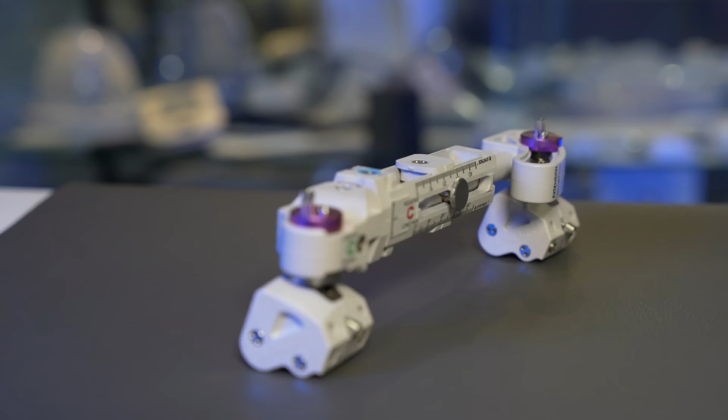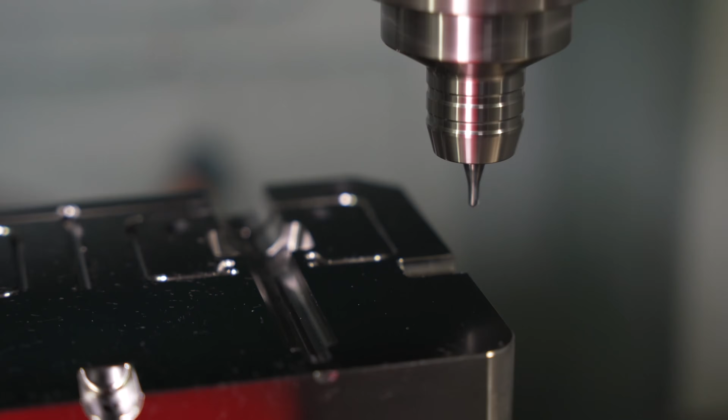Whether it's the cap on a disposable water bottle or a life-saving medical device, behind every injection molded plastic part is a precisely engineered injection mold. Designing and building these tools isn't just a simple step on the way to manufacturing, it's the foundation of reliable and repeatable manufacturing. Mistakes in the tooling stage can be costly down the line.

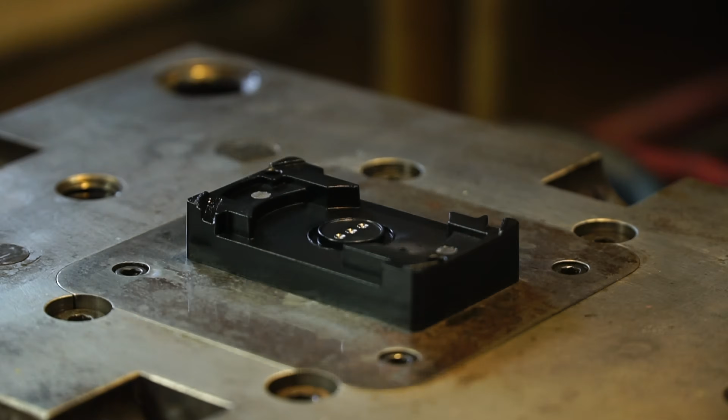So today let's break down the basics of how injection molds are designed and built, why this step is so crucial for the long-term success of a program, and whether or not a mold is worth that high upfront investment, including how to choose the right tooling partner on your next project.

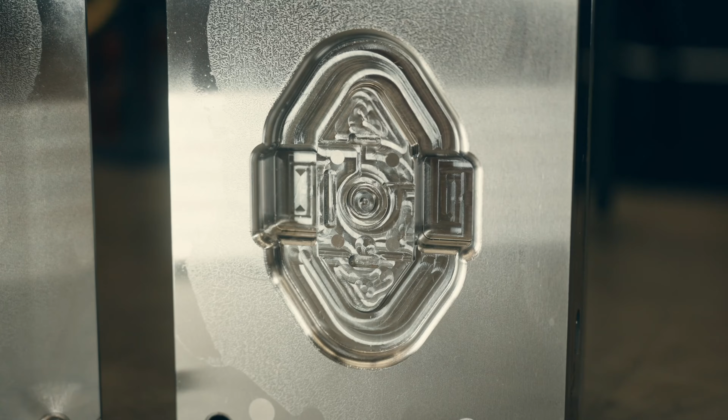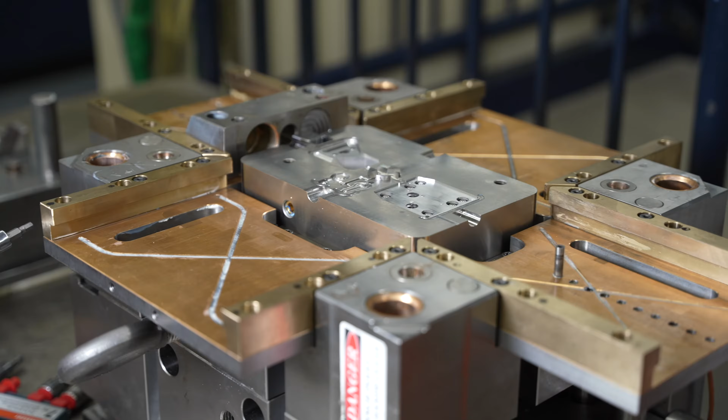In case you're brand new to this world of injection molding, let's quickly clarify what an injection mold is. Simply put, it's the block of metal that shapes molten plastic into a finished component. But if you've seen any of our previous videos on this topic, then you know that it's a bit more complicated than that.

The process of designing and building an injection mold, also known as a tool, involves several key steps, from design for manufacturing, or DFM, the mold build itself, and a number of quality certification tests before the mold is producing finished plastic parts.

If you'd like to dive deeper into Crescent's full project management process, then be sure to check out our dedicated project management video here. But every decision made during tooling will impact part quality, cycle time, and total cost of ownership, which we'll discuss more in a minute.

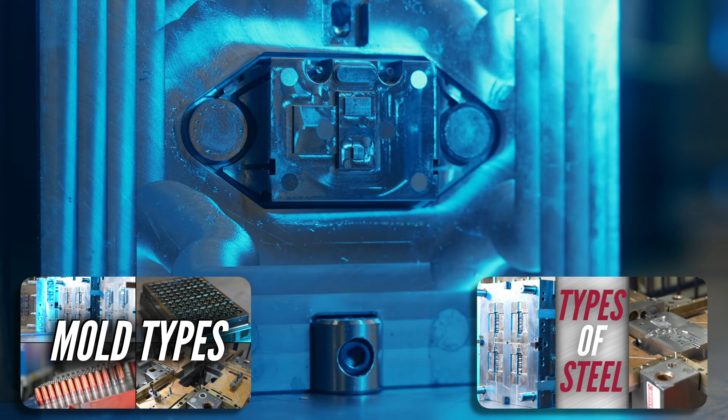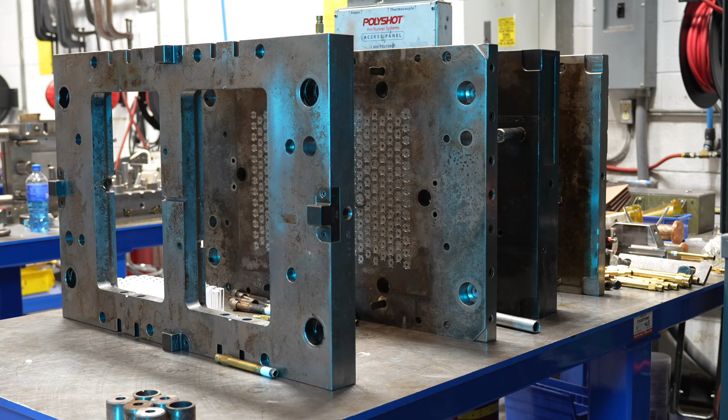Some of the most crucial factors to consider during this stage are choosing the right material for your mold, whether that be hardened steel, pre-hardened steel, or aluminum, depending on the expected volume, resin type, and the required tool life. Aluminum, for example, may be cheaper up front, but this is not a fully hardened production quality tool, meaning it won't hold up well over time, which could lead to higher cost in the future.

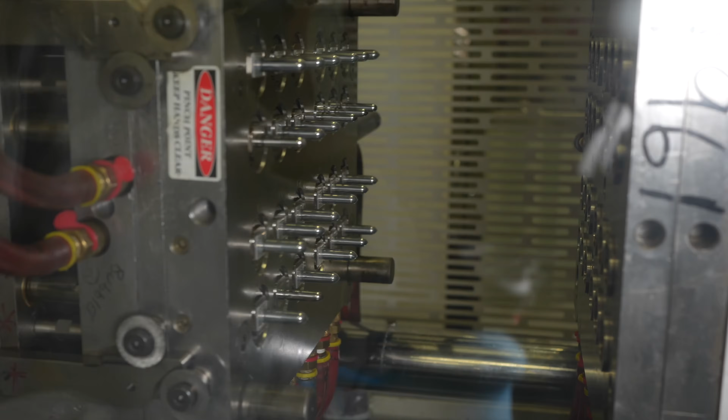Running predictive mold simulation software also helps avoid costly mistakes by simulating plastic flow, cooling, and shrinkage before machining even begins. We'll also need to decide between hot runner and cold runner systems, which is another balance of efficiency when it comes to manufacturing and tooling investment.

Determining exactly where the mold opens, known as the parting line, and how gases escape during injection is another key consideration during this design stage.

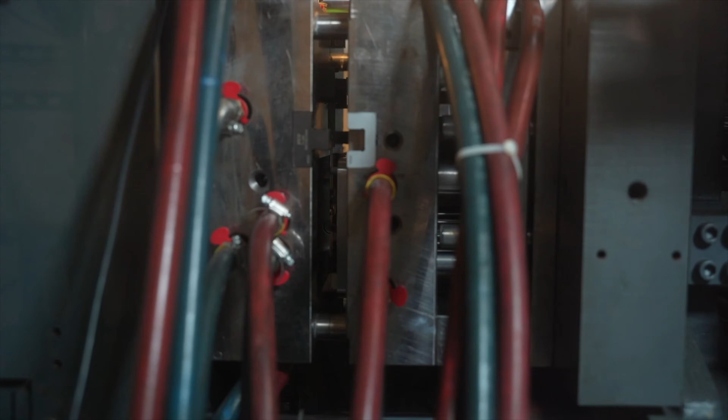And lastly, the cooling and ejection systems and designs are just as important as the design of the part itself. Water-cooled or oil-heated systems ensure proper temperature control during the manufacturing process, which again have quality, cycle time, and cost impacts down the line. Each of these decisions needs to be carefully made to achieve both a quality part at scale while keeping the total cost of ownership in mind as well.

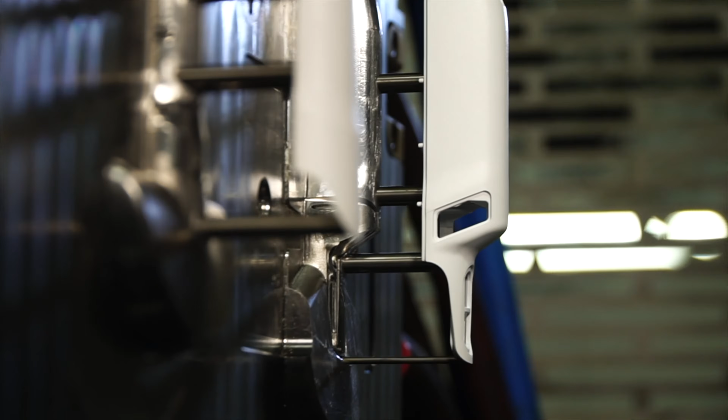Speaking of which, there's no denying that tooling is a significant upfront investment. But it's crucial to look at that total cost of ownership, since cutting corners now could lead to higher costs in the future. As I said, a well-designed tool reduces cycle time, minimizes scrap, and lowers the cost per part over the life of the program.

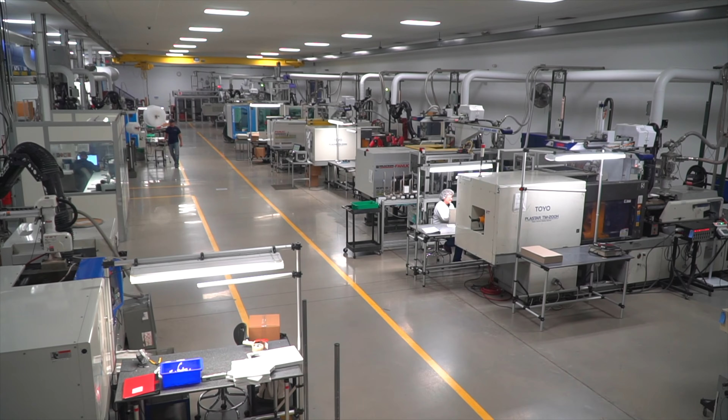Preventative maintenance and support are also key considerations, as they can extend a tool's life and reduce downtime. So when viewed in this way, tooling isn't just an expense, it really is an investment in the future manufacturing process. But is it worth that upfront investment?

Well, unsurprisingly, as an injection molder and tool builder, our short answer is yes, especially for highly regulated industries like medical, pharmaceutical, dental, and defense.

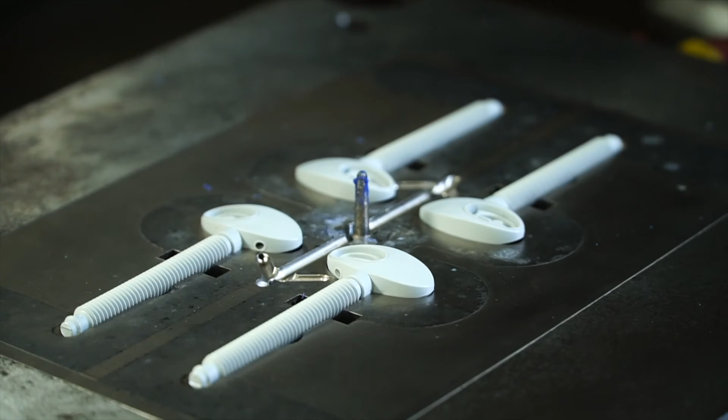But it's also our job as a tooling and molding partner to ensure that our customers are getting as high of a return as possible on that investment, and not needlessly spending their budget on a tool that has features and capabilities that are simply unnecessary for their manufacturing requirements.

That said, in the markets I just mentioned, consistency, compliance, and traceability are non-negotiables. A poorly designed tool can lead to defects, higher scrap rates, and regulatory setbacks, while a carefully engineered tool lays the groundwork for faster cycle times, consistent quality across millions of parts, and easier validation and compliance documentation.

So, looking at the entire life cycle of a program, the upfront tooling investment typically pays for itself many times over when managed correctly. Now, that all sounds great in theory, but let's look at an orthopedic surgical device that Crescent supported recently. This device required 13 different components, each with its own tight tolerances and assembly requirements.

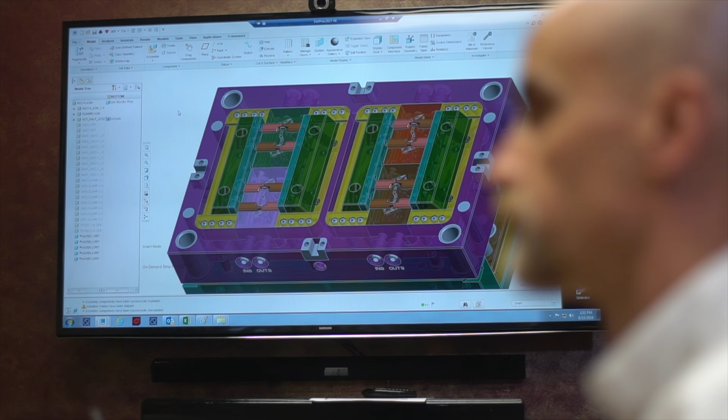So before steel was ever cut, Crescent's engineers ran mold flow simulation to identify potential risks and carefully guided this customer through each of those decisions that we discussed before building 5 custom tools to manufacture the required parts as efficiently as possible.

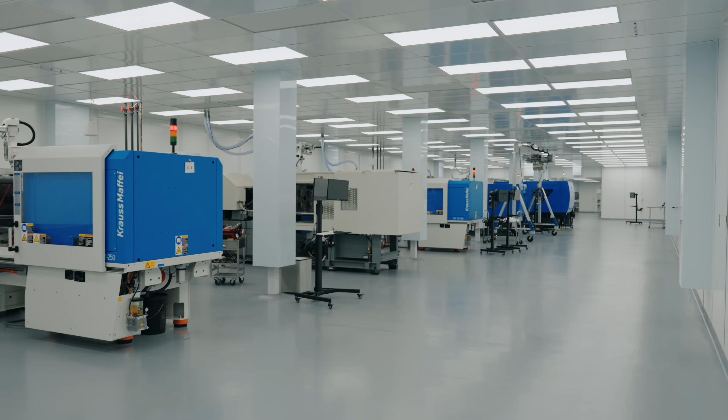The result of that upfront investment: reliable tools, optimized total cost of ownership, and consistent part quality, all of which ensured the success of the program.

We'll leave a link down below to the full case study if you want to learn more, but this is just one example of how crucial it is to get tooling right the first time.

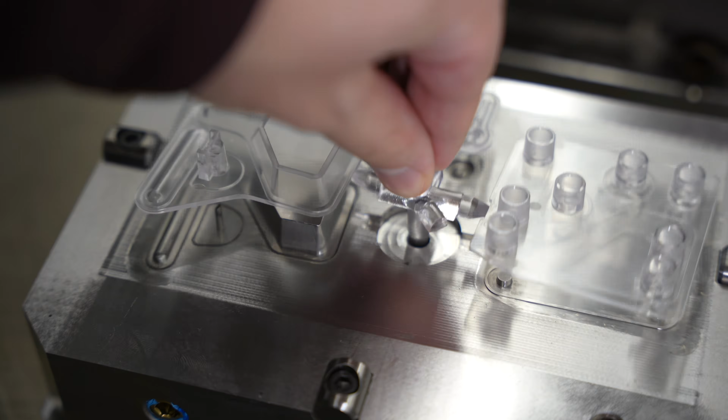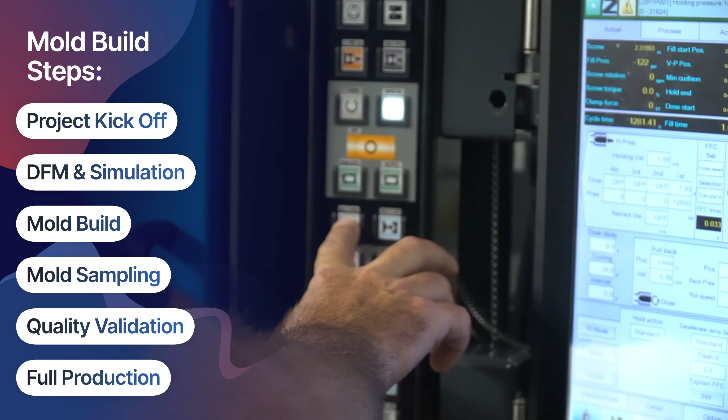So at first glance, an injection mold may just look like the first step towards making a plastic part, but in reality, it's the foundation for the entire manufacturing process. From project kickoff to production, every decision matters, and that's why having an experienced injection molder like Crescent Industries in your corner is crucial for the long-term success of your program.